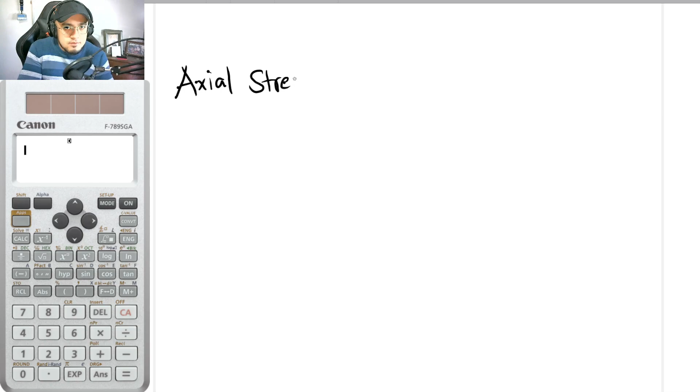So in the last video lecture that I have posted, we have already discussed axial stress. And axial stress is denoted by force over area. So ganito lang po kasimple yung axial stress. So in this video lecture, we would now be discussing strain.

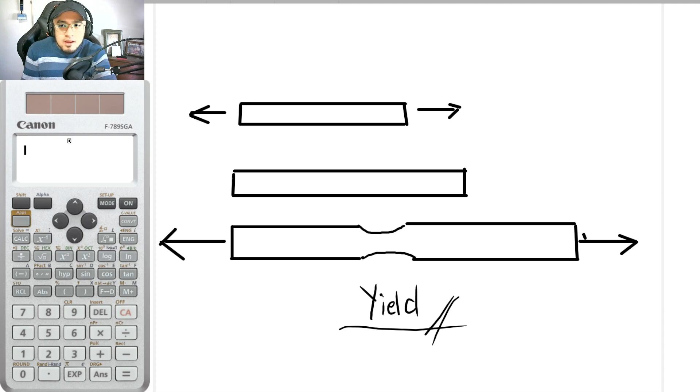But at some point, kapag nasobrahan na yung paghila mo, that is the time na masisira na yan. So ganyan na yan, tapos yung kabila ganun na din, so kumbaga naputol na po yan. In this case, ito na yung tawag natin na rupture. So rupture, at ito na yung ultimate, talagang wala na. Dito kasi nag-yield lang siya, nag-deform lang siya in this manner, pero pwede mo pa rin hilain. Kaya ganon, so ito po, ultimate na po yan, tapos pababa na ng pababa hanggang naputol na.

So those are the aspects of the stress-strain diagram in terms of materials. And once again, I would explain this further pagdating natin sa steel design.

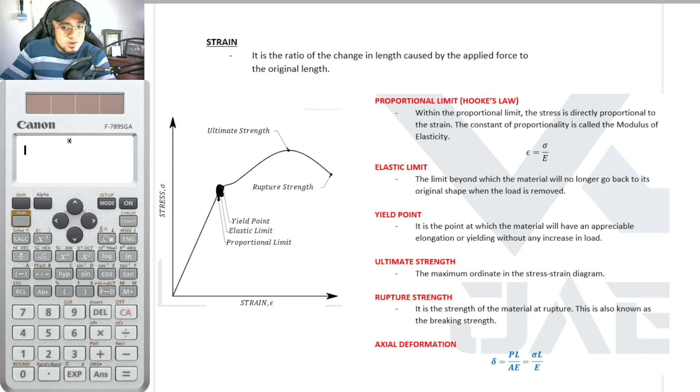Okay, so let us have our first example problem na medyo madali lang. Actually, napakadali pala. Okay, so in here, our situation is a 1.2 meter long cylindrical bar with a diameter of 0.12 meters is applied with a tensile load of 120 kilonewtons. If its modulus of elasticity is 200 gigapascal, determine its stress, elongation, and strain. So ang hahanapin natin dito, yung stress, B, yung elongation, and C, yung strain. Mali pala, ito pala is delta L or delta. So ito, elongation. Okay, so first things first, pwede naman tayo mauna sa A.

So for axial stress, napakadali po niyan. That is basically P over A. And if you want this in terms of megapascal, dapat yung unit natin dito is newtons per millimeter squared. So kapag ganyan, dapat ito naka-newtons, ito naka-millimeter squared. So ito naka 120 kilonewton, i-convert na natin sa newton. So 120 times 1,000 newtons na yan, divided by the area. So ang section natin, meron tayong ganyan.

Kasi cylindrical bar nga daw siya. So kung ito ang cylindrical bar, ganyan yung mga itsura niya. Pasensya, ang kapangit ng drawing. And if the force is applied here, yung area na i-consider natin is the perpendicular area with this force. So ito pong area na to. Meron daw tayong diameter na 0.12 meters, so i-convert natin. Multiply lang kayo ng 1,000 para maging millimeters. So 0.12 times 1,000, so 120 mm yan.

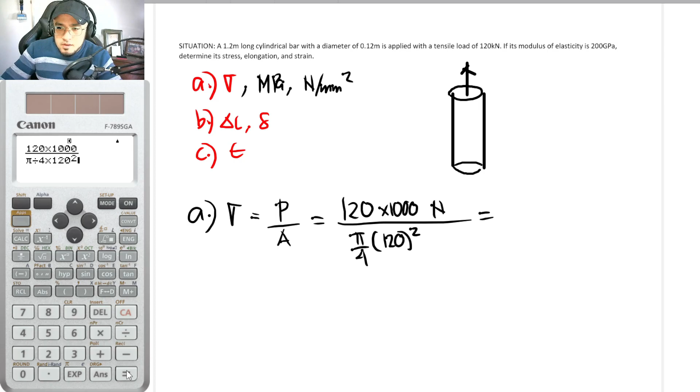So diameter yan, in order for us to solve for the area, that is pi over 4 times diameter of 120 squared. So with that, our answer is now equal to 120 times 1,000, that is now the force, divided by pi over 4 times 120 squared. Nagloloko sandali yung aking calculator. So ayan, in this case, ang stress natin is 10.610 megapascal. So basic, kapag lumabas man to sa board exam, edi instant 1 point.

So for B, what is now the elongation? So elongation is equal to PL over AE. Ang elongation natin, if we want this to be in terms of millimeters, dapat ito naka-newtons, ito naka-millimeters, ito naka-millimeter squared, tapos ito dapat naka-newtons per millimeter squared or naka-megapascal. So ganyan dapat. So unit analysis lang, no? Kung ayaw ninyo maniwala, i-check ninyo pong mabuti.

Mag-unit analysis kayo. So this now equal to, so what is the value for P? Yung P natin, ulitin ko lang, dapat naka-newtons, and since 120 yan, kilonewtons yan, 120,000 newtons yan. Times the length. So gaano kahaba yung member natin? It is indicated in the problem that this is equal to 1.2 meters. And if you would be converting that into millimeters, 1,200 mm.

So divided by the area, that's pi over 4 times 120 squared times E. So our E is in terms of gigapascal, 200 gigapascal. So how many megapascal are in one gigapascal?

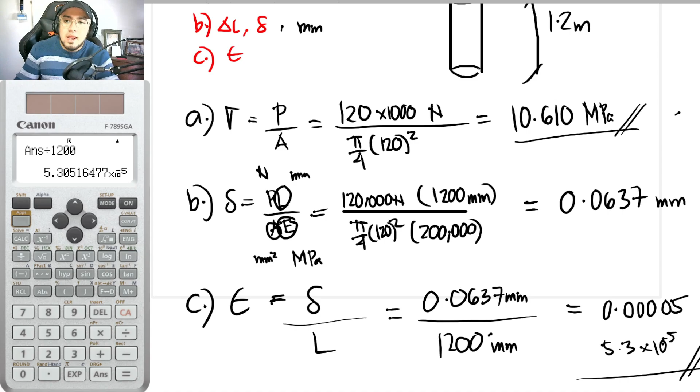So that's it, it's very small. So 0.00005, or 5.3 times 10 raised to negative 5. The strain is very small. Why is that? Because the diameter is quite large, and it's quite strong, the member is stiff because it's 200 gigapascal.

That's a very large value. Okay so that's for the first problem. So for our next problem here, the situation is we have a rigid bar.

The rigid bar AB is attached to two vertical rods as shown. So this is the rigid bar, meaning it does not deform. However, it is connected to this rod here and this rod here, and they are deformable because they have given modulus of elasticity.

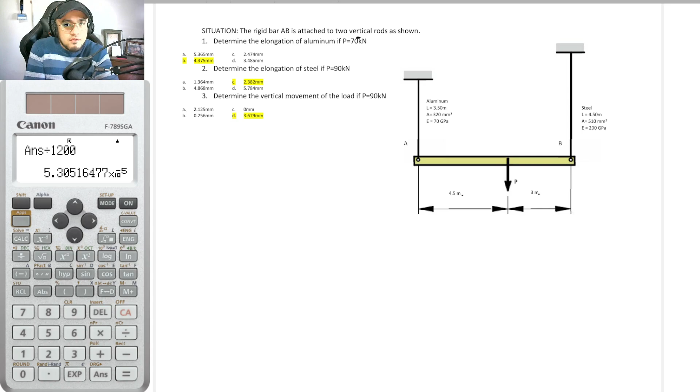Okay, so determine the elongation of aluminum if P is equal to 70 kilonewtons. So what we'll do here is solve for elongation, and elongation is once again equal to PL over AE.

So in this problem, there are already highlighted answers. This is the answer for 1, 2, and 3. This came from the module of Sir Segundo, and according to Sir Jeyus, these are the answers, and I will be answering this. To be honest, this is my first time seeing this problem.

Okay so for this, let's find the elongation of aluminum. If we create the free body diagram of this, what will happen is, if this is now the rod, we have a force at A. So we have tension here. We also have a support here at the steel, and we have force P here. So this, let me just rewrite it here.

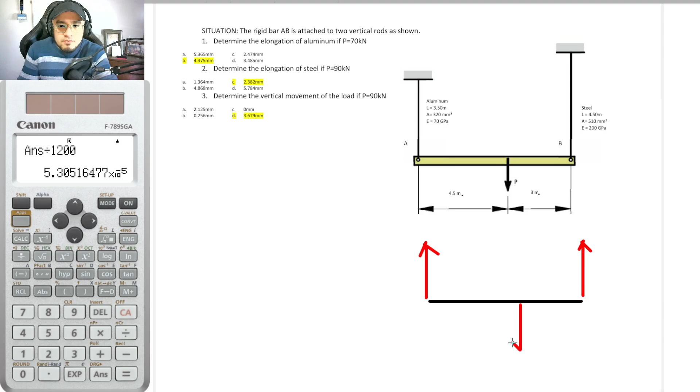Let's say this is now P of aluminum, this is now P of steel, and this is now the given P. So this is the given P in this case. So if P is equal to 70 kilonewtons, let's say that's 70 kilonewtons.

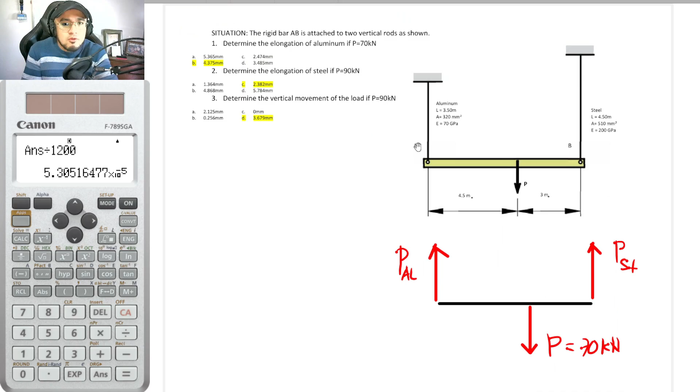What is the P of aluminum? Since aluminum is what we're solving for, what I'll do is take the moment at the steel. Let's say this is now point A and this is now point B, just for pretend. So summation of moment at B, just to get the AL.

is equal to 0. You decide which direction you want, let's say clockwise positive. So with this, P of aluminum times the lever arm, let's take the moment. What's the lever arm? That's 3 meters plus 4.5, so that's 7.5 meters.

So next, this is the aluminum, and since it's clockwise direction, positive. We also have P. Now, since this P has a tendency to rotate B in a counterclockwise direction, it should be negative. So negative P, that's 70 kilonewtons, times the lever arm. How far is that? That's 3 meters according to the problem. So times 3 meters, this is now equal to 0.

So solving for PAL, PAL is now equal to, you decide how to solve that. So 70 times 3 divided by 7.5, that's it. This is now equal to 28. Take note, the answer should be in kilonewtons.

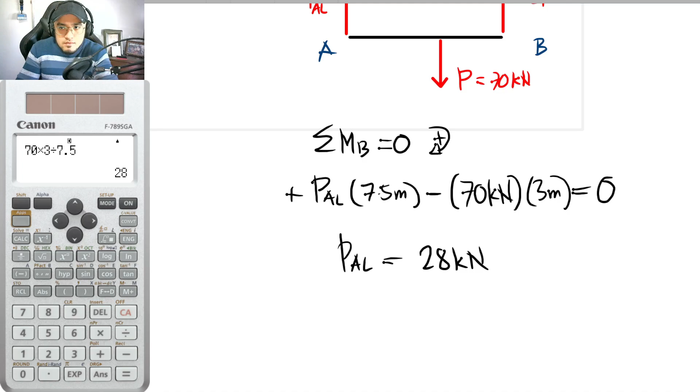Okay so the question is elongation. Let me repeat, elongation is equal to PL over AE. So P is now equal to, since this is aluminum, all of this is for aluminum, so PAL is what we'll use. That's 28 kilonewtons. But take note guys, it's in kilonewtons.

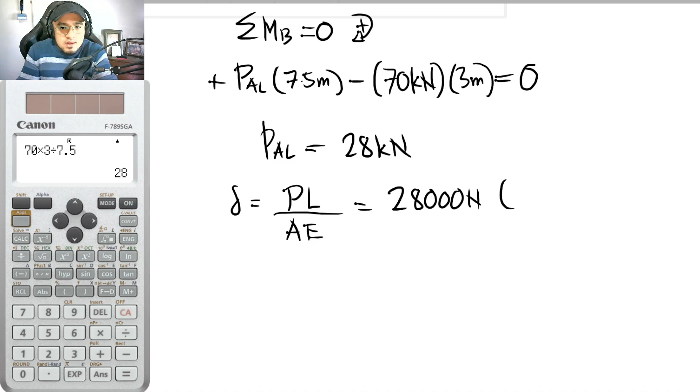And in our problem, we want it in mm since the choices are all in mm, so P should be in newtons, this in mm, this in mm squared, then E should be in newtons per millimeter squared or megapascal. So this 28 kilonewtons, let's convert to newtons right away, so that's 28,000 newtons. Times L, what's the length of our aluminum? That's 3.5 meters.

So 3,500 mm divided by the area, given po yan, that is 320 millimeter squared, times the modulus of elasticity of 70 gigapascal. And gusto po natin naka-megapascal yan, so convert nyo na lang po. Pero pag 70 gigapascal, automatic po yun 70,000 megapascal. So solving for this one here, we would now arrive at an answer of, so 2,800 times 3,500 divided by 320 divided by 70,000. So our answer here is now equal to

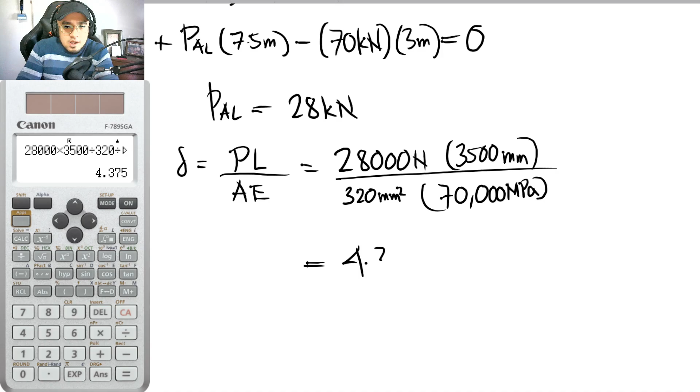0.4375. Teka, parang may mali. So meron nga mali tayo dito, nagkulang ako ng 0 dito. So 28,000, 2,800, so dito ang answer natin is 4.375 mm, I should say. So apologies, yan, 4.375.

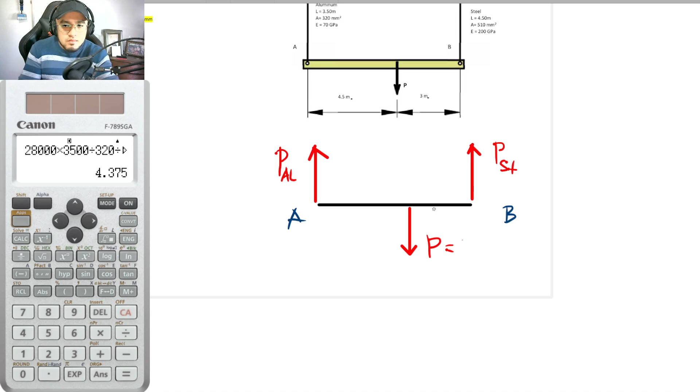So, ayun, yun po yung answer. Okay, so next, ano daw po yung elongation ng steel? If P is now equal to 90 kilonewtons, so ito, delete ko na po ito, kasi magbabago na po tayo ng solution. 90 kilonewtons na daw po ito. So, 90 kilonewtons.

Okay, so anong tanong? So, elongation of steel. So this time, we would now be getting PST. So kapag ganon, mag-summation of moment about B po tayo, or A, I should say, is equal to 0. Then, clockwise positive na lang, kayo bahala. And with that, so meron tayong steel. So since counterclockwise itong steel natin, negative PST times the lever arm of 7.5, so 4.5 plus 3, so 7.5.

Then plus, ito naka-clockwise to, so plus 90 times lever arm of 4.5. So wala na pong iba. So with that, PST is now equal to, so kayo na po bahala kung mag-shift solve pa kayo or what. Pero 90 times 4.5 divided by 7.5 lang yan. So we now have an answer of 54

kilonewtons. So since deflection or deformation po yung hanap natin, this is once again equal to PL over AE. Pero malamang if steel to, dapat lahat to pang steel. So ganon. So what is the P? P ng steel, that is 54,000 newtons times length. Ano po yung length natin? That is 4,500 mm, so ito po, 4.5 meters.

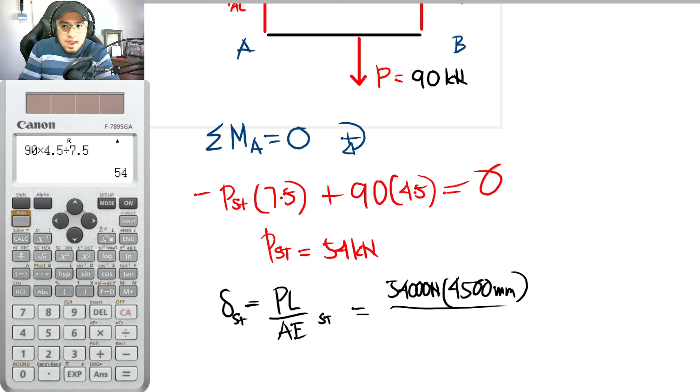So 4,500 mm divided by A. So the area here is equal to 510 millimeters squared, so given po to sa problem. And ang E daw po niya is 200 gigapascal, so times 200, pero naka-gigapascal yan, convert na po natin sa megapascal. Okay, so with that, the deformation of steel is now equal to 54,000 times 4,500 divided by 510 divided by 200,000. So answer here is now equal to 2.382.

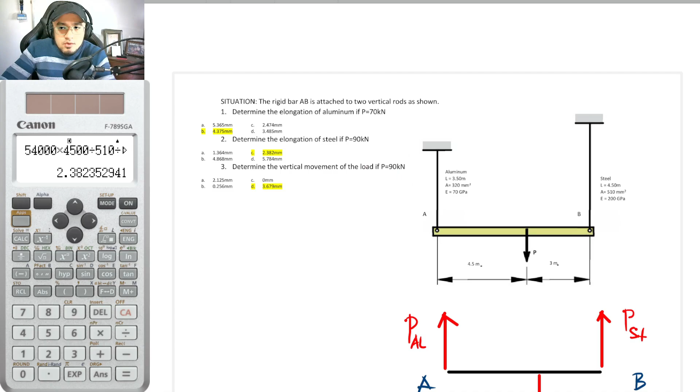So 2.382 mm, so ito siya. So 2.382 mm. Okay, so for number 3, determine the vertical movement of the load if P is equal to 90 kilonewton. So ano daw po yung vertical movement at this particular portion?

Okay, so in here, di ba meron nga po tayong rod na nandito, tas rod din na nandito, then meron daw tayong body dito. So ngayon, if we would be having a certain load here, yung tendency nga, hahaba po ito, tapos hahaba din ito, so maaring hindi sila pantay. So hindi ko po sigurado kung ano po yung mas magde-deform dyan, baka aluminum, so hula ko lang.

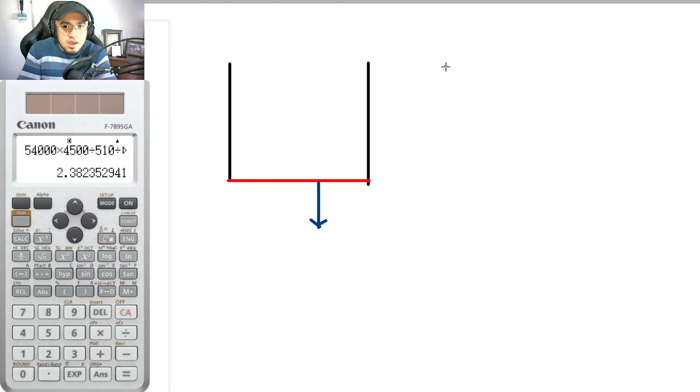So kapag ganun po, ang tendency is hahaba po ito, so magiging ganito siya. Tapos hahaba din itong isa, siguro ganito lang. So hindi ko po sigurado, no, i-check na lang natin mamaya. So pag ganyan, kunwari, hahaba siya ng ganyan. Then yung magiging beam na natin is magiging ganito.

So if this was the original level, so kung ito man po yung original natin na beam, ito po, itong part na to, this is the deflection ng aluminum. Ito naman po is the deflection of steel. So ang hinahanap po is yung deflection na nandito sa part na to. So if nandito po yung, ang tawag dito, if nandito po yung ating P, ang hinahanap po na deflection is ito daw po. Ano daw po yung deflection na nandyan? Okay, so ang approach po natin dito, we would be solving for the deformation of the steel, the deformation of the aluminum, then by similar triangles or by trigonometry, pwede na po natin masolve to.

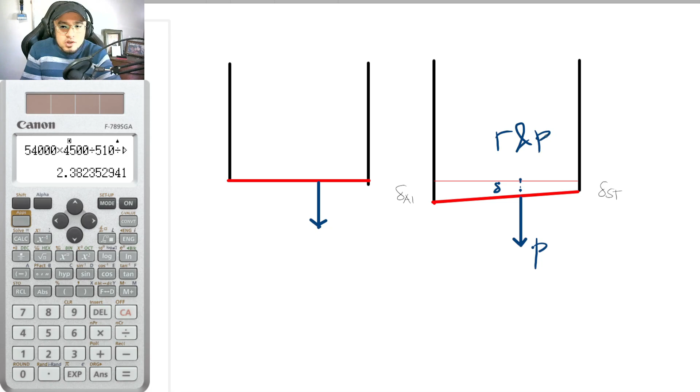So pwede pong by ratio and proportion. So ito po long cut method. But for our approach here, pwede po tayong mag-mode 3-2.

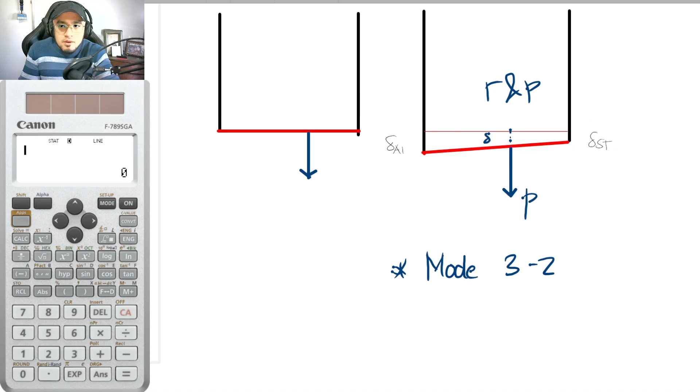Kailangan po muna natin makuha itong deflection ng aluminum pati deflection ng steel. But for the deflection of steel, we have already solved for it, and that is 2.382. So ito, 2.382 mm. So what about for aluminum? Kung nagtataka kayo, di ba na-solve na natin yan kanina?

Hindi pa, actually. Kasi yung na-solve natin kaninang deformation or elongation ng aluminum, that is P is equal to 70 kilonewtons. Pero ang P nga na dapat natin is 90 kilonewtons. Okay, so i-solve din po natin yung PL over AE ng aluminum. But with that, guys, kailangan po muna natin ma-solve ano yung PAL. So pwedeng mag-moment pa rin kayo dito or summation of forces vertical na lang. So whichever the case may be, you should arrive at the same answer.

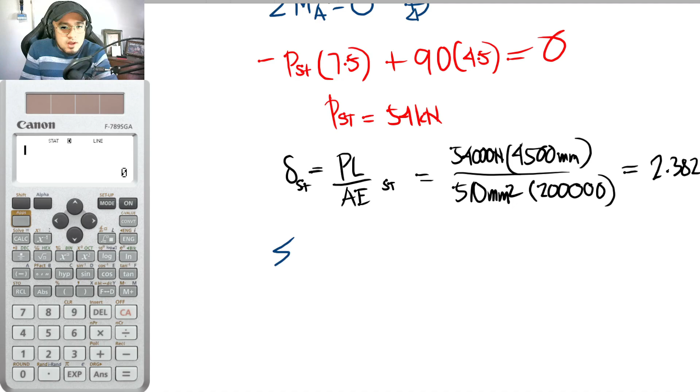So for the summation of forces vertical equal to 0, upwards positive, ito po yung gagamitin natin. So PAL, positive yan kasi pataas, plus PST minus P is equal to 0. So ayan, pataas yung PAL pati PST, pababa yung P. So substituting known values. For PAL, we do not know this actually. For PST, this is 54 kilonewtons. And for P, this is 90 kilonewtons. So I'm just substituting all known values.

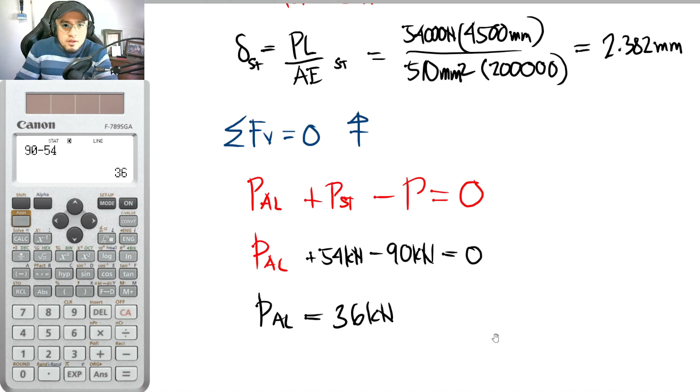So with that, PAL is now equal to, i-transpose ito sa kabila, magiging positive to, magiging negative to. And this is now equal to 90 minus 54. So you would be arriving at an answer of 36 kilonewtons. And for the deformation of the aluminum, this is now equal to PL over AE. So PL over AE pa din yan. And this is now equal to, so P natin, that is 36,000.

Times length. Ano po yung length natin? For aluminum, 3,500. So 3,500 divided by A. So the area of aluminum is 320. Tapos yung modulus of elasticity niya is 70. So 320 mm squared, tapos 70 gigapascal or 70,000 megapascal. So ang elongation natin dyan is equal to, oops, sorry, balik muna tayo ng mode 1.

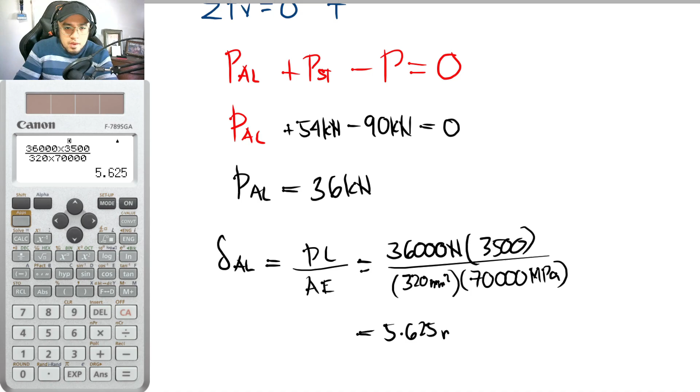So 36,000. Bakit 3,600 lang to? So 36,000 dapat to, guys. So urong ko lang dito. So 36,000 times 3,500 divided by 320 times 70,000. So ang deflection po natin dito is 5.625 mm. Okay, so going here, this is now 5.625 mm. So ito yung part na to.

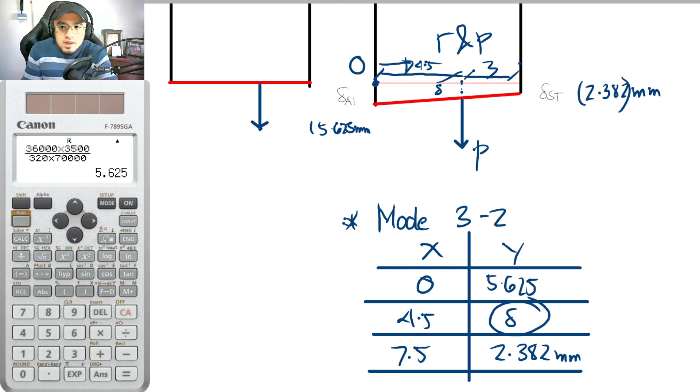So pwede po kayong mag-interpolate. Interpolation yan. And by making use of our calculator, pwede po tayong mag-interpolate sa mode 3-2. So ito po yung table na lalabas. But take note guys, hindi po natin i-input to, kasi hindi naman natin alam ito. So in order for us to solve for this, the deflection is equal to y-hat kapag x is 4.5. So 4.5 y-hat. Ipapakita niya kung ano yung value ng y if yung x mo is 4.5.

So ulitin ko lang, hindi po natin i-include to kasi hindi nga natin alam tong value na to. So ilalagay ko sa una, that is 0, tapos 7.5. Tapos dun sa y naman, that is 5.625, tapos 2.382. So pag mag-interpolate kayo ngayon, close ko na yan. So ilalagay ko lang po ito.

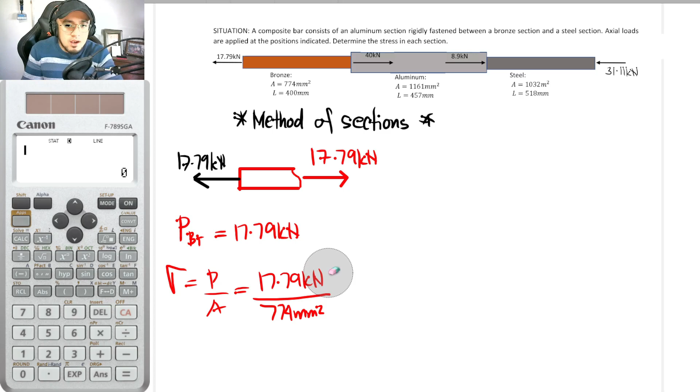Ang tinatanong po ngayon is the stress. So, stress is equal to P over A. So, substituting known values, 17.79 kilonewtons divided by the area of 774 millimeters squared. But once again, if you want to have an answer in terms of megapascal, i-convert po natin into newtons. So, this is now equal to 17.79 times 1,000 divided by 774, and our answer here is equal to 22.98 megapascal. So, newtons per millimeter squared, megapascal yan.

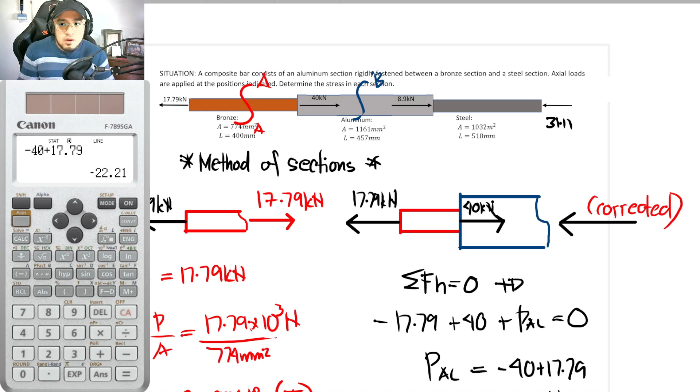So, scroll ko lang po ito pababa sandali. So, substitute in known value. So, 22.21. Multiply na po natin sa 1,000 para maging newtons. Then, divide this by the area. And the area of the aluminum is 1161 mm squared. So, 1161 millimeter squared. So, yan.

Teka. Tawag dito. Actually, hinihingal ako ngayon kasi may dumating akong Shopee. Flex ko lang. So, 22. Teka. Balik na po ako dito.

So, 22.21 times 1,000 divided by 1161. So, this is now equal to 19.13 megapascal. Tapos, compression.

So, hindi ko alam kung nakita nyo. Pinost ko pa actually yung video. Tapos, kinontinue ko lang. And, ayun. Nakasturbo kasi nag-ring phone ko. SKL, kwento lang.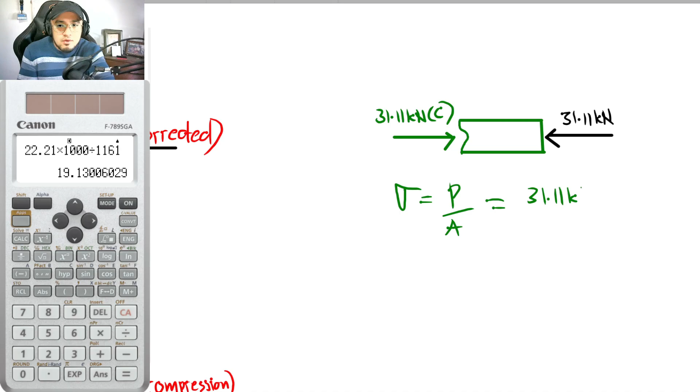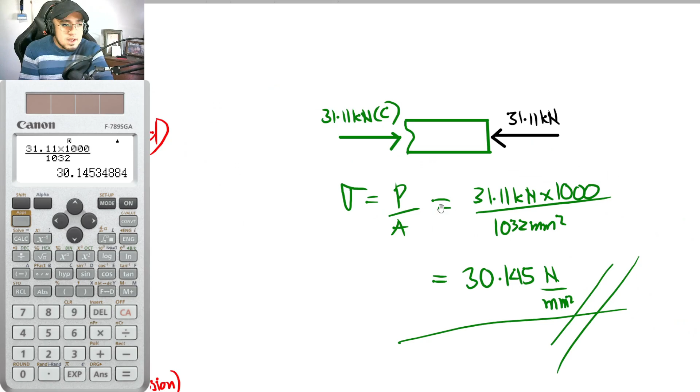And with that, the stress here is equal to P over A. So P is equal to 31.11 kilonewtons. Multiply na po natin sa 1,000 para maging newtons divided by the area of 1032 millimeters squared. So with that, 31.11 times 1,000 divided by 1032. So our answer here is now equal to 30.145 newtons per millimeter squared or megapascal. So that is our answer here. So ulitin ko lang, regardless if you would be choosing this side or this side, we would still be arriving at the same answer if you did it correctly. So there.

Okay, so next problem po tayo in here. So the situation here is that the compound bars are restrained at both ends as shown. The change in temperature is 50 degrees Celsius. The aluminum bar has a diameter of 20 mm and the steel bar has a diameter of 15 mm. So the modulus of elasticity for aluminum is 70 gigapascal. And we have the thermal coefficient for steel equal to 0.0000116 per degree Celsius. And for aluminum, which is 0.00017 per degree Celsius.

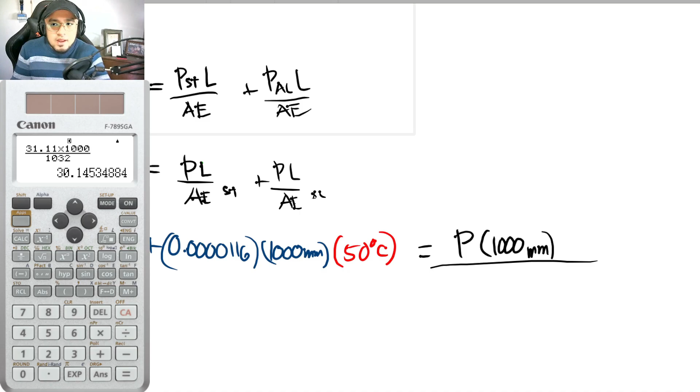So the area of a steel is equal to, so the diameter of steel is 15 mm. So ang area po ng 15 mm diameter is pi over 4 times 15 mm squared. Okay, so PL over AE, ano po yung E ng steel? So ang given lang po dito is aluminum, which is 70 gigapascal. So if it is not given in the problem, the default modulus of elasticity for steel is equal to 200 gigapascal or 200,000. Default po to.

So plus, so doon naman na po tayo sa aluminum. And ulitin ko lang po yung P ng aluminum, parehas lang. So P times the original length. Ano po yung original length ng aluminum? That is 800 mm. Divided by pi over 4. So ang diameter po ng aluminum natin, that is 20 mm. So 20 mm quantity squared times, so dito po sa aluminum, hindi po 200,000 ang E niya. So given po sa problem that is 70,000 megapascal.

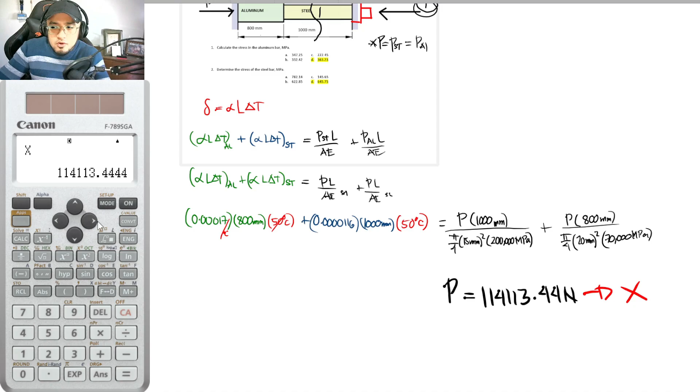And since gumamit po tayo ng shift solve, automatic po na ma-store na siya sa X kahit hindi mo pa po i-shift store. So pag pupunta po ako ng alpha X, ayan na po automatic 114,113. So it is needed in the problem that we are to solve for the stress at the aluminum bar. So ulitin ko lang, P, kung ano man po yung nasolve natin kanina, parehas lang po siya sa steel, pati sa aluminum. Kasi wala naman pong external force dito. So stress at the aluminum bar.

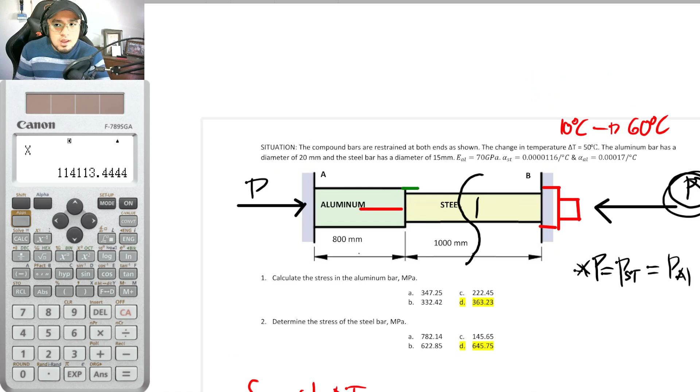So P aluminum divided by the area of the aluminum. So P of the aluminum is 114,113.44 newtons divided by the area of the aluminum. Ang diameter niya is 20. So pi over 4 times 20 squared. So dito alpha x divided by pi over 4 times 20 squared. So ang answer po natin dito, 363.23 newtons per millimeter squared or megapascal.

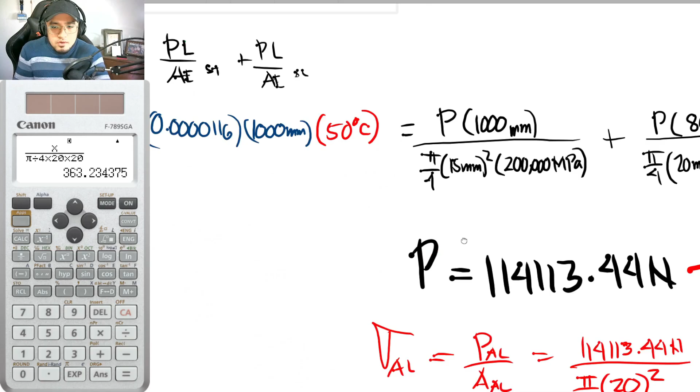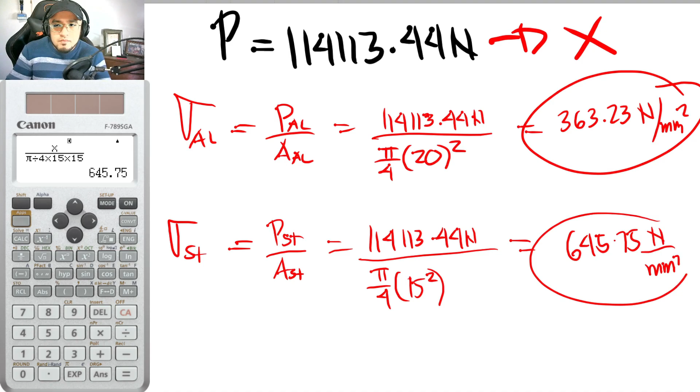Then for number 2, same process. So for steel, that is equal to PST divided by AST. So substituting known values, 114,113.44 newtons divided by pi over 4 times 20 squared. I mean, yung diameter po natin for this steel is 15 mm. So 15 squared. Palitan ko lang po dito sa equation natin na 15 yung dalawang yan. So 645.75 newtons per millimeter squared. So yan po yung stress dyan.

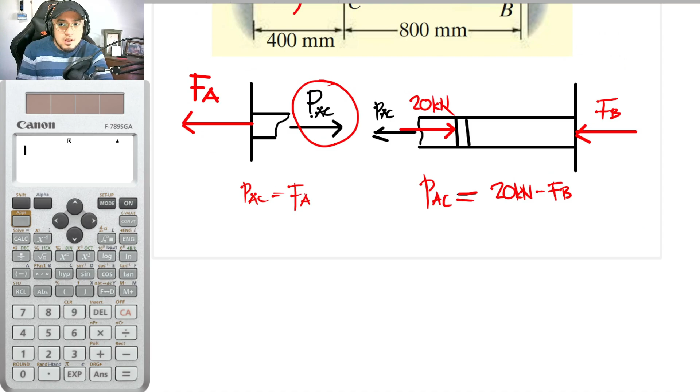Ibig sabihin hindi po natin mairerekta kasi yung elongation nito, PAC, and ito po yung masub natin. Ibig sabihin hindi nga po. Ang gagawin natin, gagawa tayo ng ibang approach in such a way na masasatisfy po natin itong equations na to, itong figure na to. Ulitin ko lang, kapag magde-deform po itong PAC, may tendency po na lalagpas siya dyan. At pag lumagpas po siya dyan, kukontrahin po ni FB, ibabalik po niya up until this portion. And this portion here is equal to 0.2 mm. So pag gagawa po tayo ng equation, ibig sabihin 0.2 millimeters, that is exactly equal to yung deflection po ng AC natin, deflection of AC minus the deflection of CB.

So ngayon, itutulak po niya yan. Pag tinulak po niya yan, tapos lumagpas, ibabalik po itong FB. So ayan, deflection due to FB. Lagi ko na lang po dito i-delete. Deflection due to FB. So ulitin ko lang, pag humaba yan, kukontrahin nito, tapos dapat pag kinontra niya, maging answer niyan ay 0.2 mm.

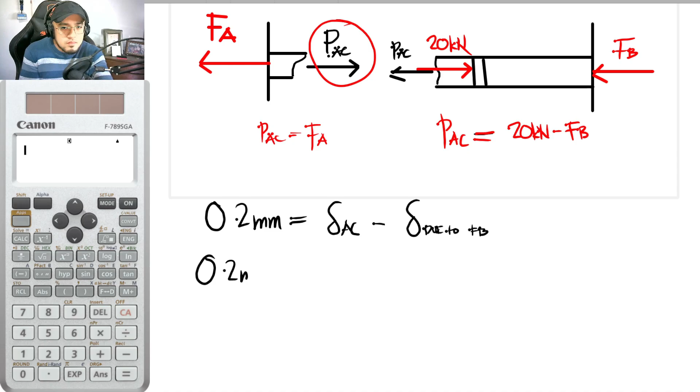Okay, so with that, 0.2 mm is now equal to, so what is this? So this is now PAC times LAC over AE. So minus, ano naman po to?

So ito po dapat yung FB natin, kung ano man po yung ikokontra niya. So FB times L, itong length na to, kapag pag kinontra po niya, ang magde-deflect po dyan is just these parts. So ayun, 800 mm.

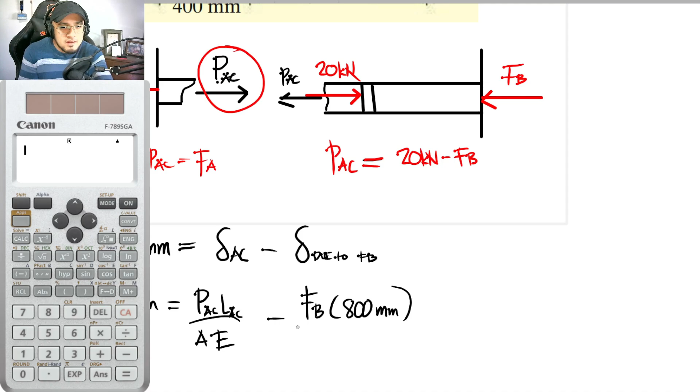Lagay ko na nga dito, rekta na natin, divided by AE. Ulitin ko lang guys, itong FB kasi na yan, kapag dumikit yan, if you would be cutting a section here, di ba ito naman po yung magde-deflect kapag magkaroon po tayo ng force. If you would be cutting a section here, ang mangyayari po dyan, mag-draw lang po ako dito sandali. So ito po yung wall natin and ito na po yung member.

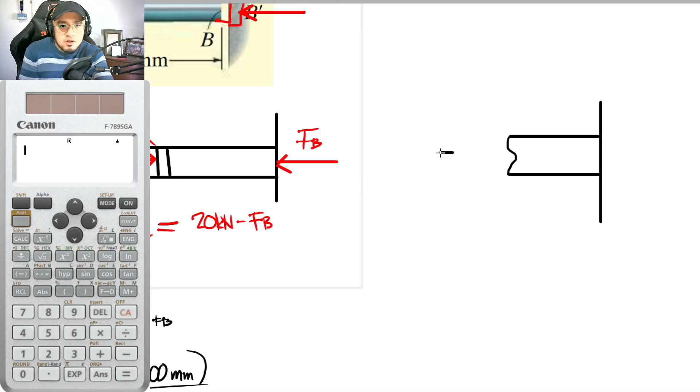So let's say that this is now the member. And ito siya, pag nakat na po natin yan. So ito na po yung force natin, yung force natin na CB. So PCB pala to, F tuloy, PCB. Tapos meron nga tayong resultant dito, meron tayong resultant dito ng support. So ito yung pangongontra niya.

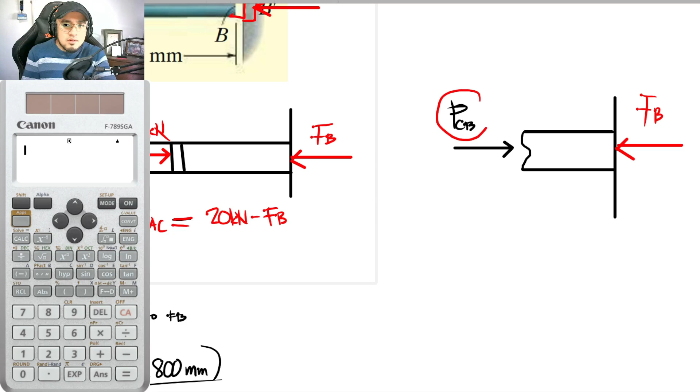That is FB. So basically guys, itong PCB na to, exactly the same siya with FB. So sa totoo lang, baka nalito kayo, yung totoong maging equation natin dito, this is PCB times LCB. So ganyan po talaga. However, due to this fact, yung FB natin, same din na siya sa PCB. Pero sige, mamaya na nga yan.

Dito muna po tayo. So substituting known values, 0.2 mm is equal to PAC times LAC. Yung LAC natin, that is 400 mm. Divided by A. Siguro para sa A, guys, since magkaparehas lang naman tong dalawa ng area, i-solve na lang po natin ng hiwalay yung area. So area is equal to pi over 4, and it is given in the problem na meron po siyang diameter natin.

So 10 squared, so pi over 4 times 10 squared, so that is now equal to 25 pi. Pero i-store ko na lang po sa A. Shift store sa A. I-recall na lang po natin mamaya. Shift store A and then ayun. So A, lagyan natin po ng A dito.

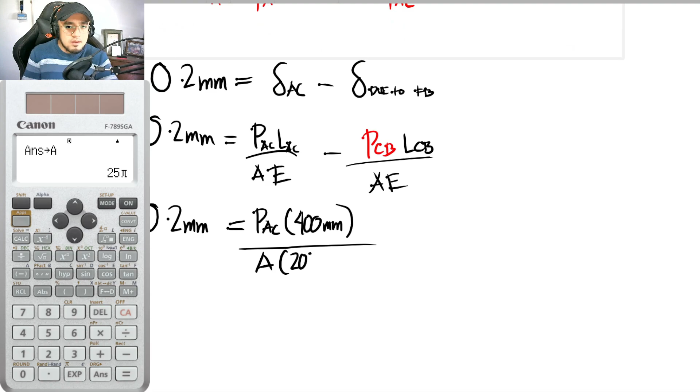And for E, since bakal po yan and it is given in the problem na 200 gigapascal, then 200,000 megapascal. So this is now minus, what is PCB? So PCB nga, nalagay ko times LCB, ano po yung length nito CB na to, that is 800, divided by A. So same lang naman silang dalawa ng area, times E.

Okay, so we have two unknowns with one equation. So let us now call this equation number 1. Okay, meron actually tayong dalawang approach. If this is PCB, pwede naman tayo mag-cut ng section. Tapos pag nag-cut tayo ng section dito, i-consider natin yung left side, magiging 1 equation, 1 unknown.

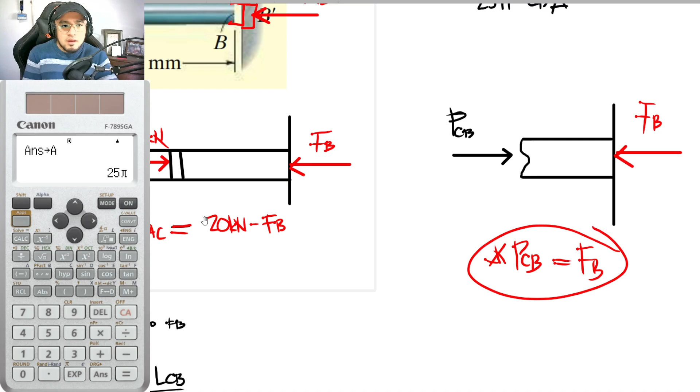Pero sige, mamaya na yan. So pwede din actually na kapag mag-cut tayo ng section, ito siya. So with that, pwede nating masabi na PCB is equal to FB. At gamit itong figure na to, masasabi natin na PAC is equal to FA. So yung isang approach natin is to rewrite it like this. So 0.2 mm is equal to, yung PAC nga, nasabi nga natin dito, that is FA.

So FA times 400 divided by A times 200,000, minus PCB. At PCB nga po natin, that is FB. FB times 800 divided by A times 200,000. So we have two equations, two unknowns.

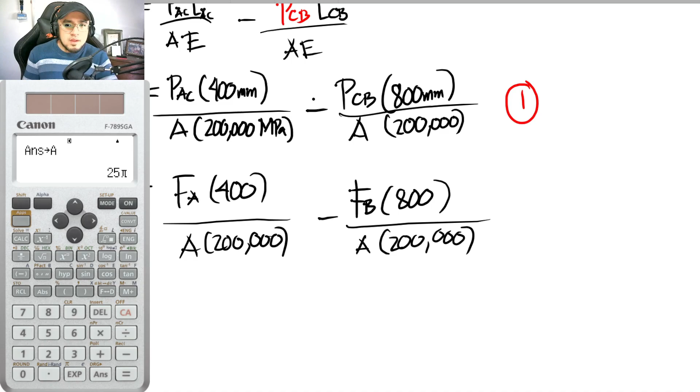Tapos sa approach na to, i-compare natin itong dalawa. So as a whole, if this is now the case, i-redraw ko po dito sa baba. So meron po tayong pader dito, meron tayong member dyan, meron tayong kwelyo dito, meron tayong pader dito. Assume na po natin na matatamaan po talaga niya. At meron daw po tayong force dito na 20 kilonewtons.

Let's assume this is A, so FA. Then we also have FB here. So looking at the summation of forces horizontal, we can say that 20 kilonewtons is equal to FA plus FB. Or it could be negative FA plus 20 minus FB, but if you simplify it, it becomes the same thing. So with this comparison, we can now say that FB is equal to 20 kilonewtons minus FA.

So if I substitute it here, make sure it's in newtons. So FB is equal to 20,000 newtons minus FA. Substituting this, let's say this is now equation number 2, and this is equation number 1.

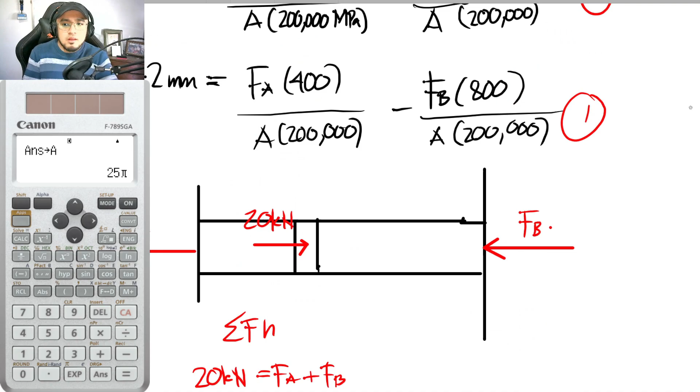So substitute equation number 2 in equation number 1. Let me zoom out so we can see both. So 0.2 mm is equal to FA times 400 mm divided by A times 200,000, minus FB - which we know is 20,000 minus FA times 800, as a quantity, divided by A times 200,000.

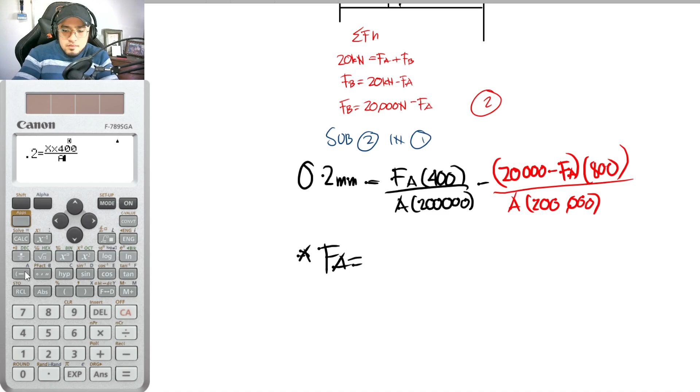Okay, so now we can shift solve for FA. So FA is now equal to - using the calculator, 0.2 is equal to X or FA times 400 divided by alpha A times 200,000. Wait, did we store the 25 pi value? Let's store it again just to make sure, since we have trust issues and might forget. This is the area, shift store into A. Okay, 25 pi, correct. So going back here.

Let me repeat: 0.2 is equal to alpha x times 400 divided by alpha A times 200,000, minus - alpha x, sorry, 20,000 newtons minus alpha x times 800, divided by alpha A times 200,000. Is it 200,000 on the other side too? Okay, so with that, let's shift solve.

So let us solve for the value of x. And this is now equal to 15,951 newtons, which is approximately equal to 15.951 kilonewtons. So that's about 16 kilonewtons here, according to this book - they just rounded it up. So that's 16 kilonewtons as well. Okay, so that's for FA.

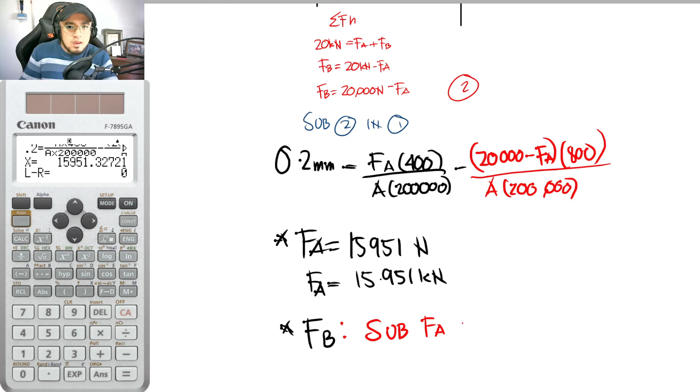So for FB, we have from equation number 2 - substitute FA in equation number 2. So FB, what was our equation number 2 again? That is, FB is equal to 20,000 minus 15,951. So FB is now equal to - looking at the calculator, that's our answer.

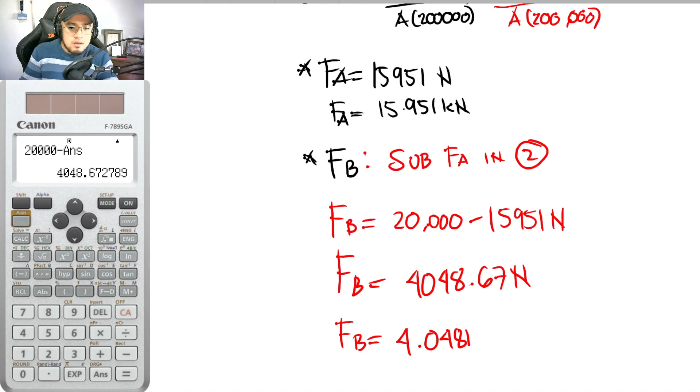So 20,000 minus the answer, that is 4048.67 newtons. So FB is equal to - divide that by 1,000 - 4.048, so that's our final answer for FB. And from our answer key, it's 4.05, so that's the answer - exact same.

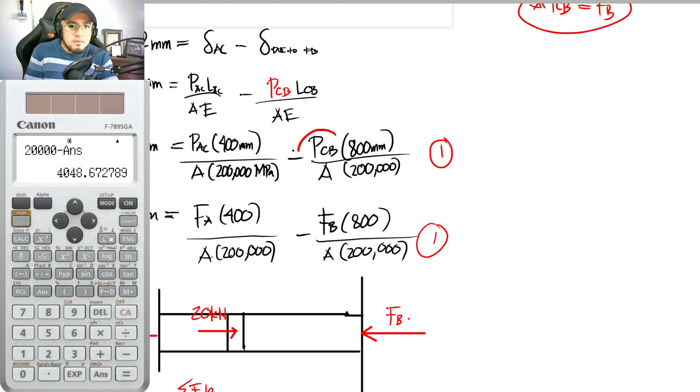But once again, like I said, this is just one approach. The other approach is a little bit more advanced but uses the same concept. For PCB, instead of using this part, we do method of section on CB, and then we consider the left side. It will look like this - if this is now the wall... let me repeat, we already answered the problem, but this is another way. So if this is the collar, this is the wall, and here is where we section.

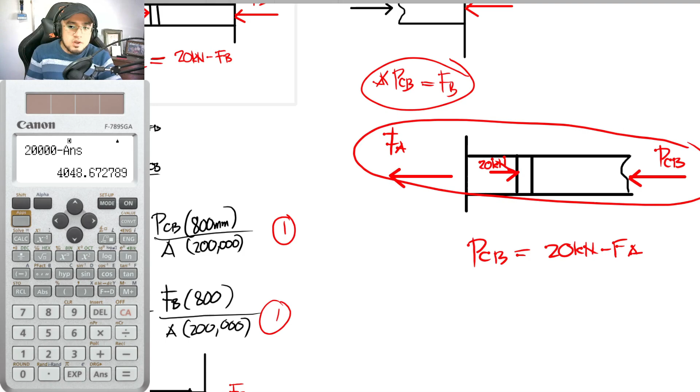And we have a force here, let's say this is FA. So if this is FA, and we also have 20 kilonewtons here. So if this is now - what do you call this - PCB, then comparing here, PCB is now equal to 20 kilonewtons minus FA. Looking at this, even if you do summation of forces horizontal, you'll arrive at this same equation.

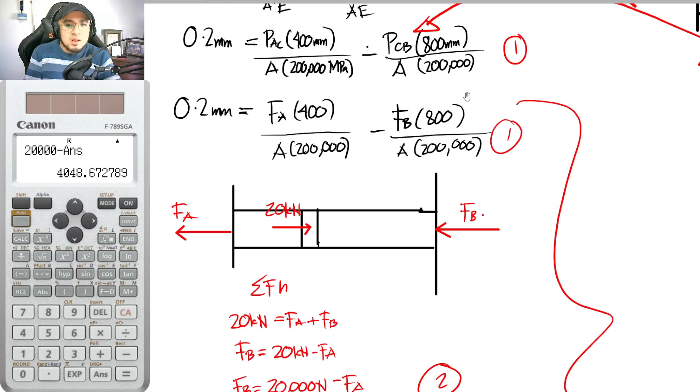And with that, for PCB, we can directly write it already. Once we write it directly for PCB and substitute it here, what happens is we can skip all these steps - we go straight to it. So as you can see, 20,000 minus FA, once you transfer it, it's already direct. We can skip these steps, go straight there, and we can solve it directly already. So those are two approaches but they give you the same answer.